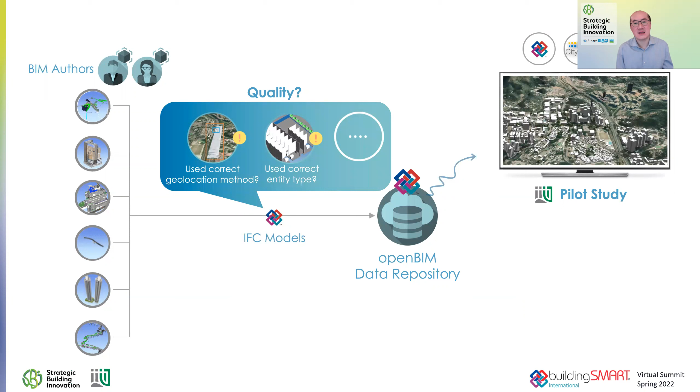As we often see, the geolocation method may not be accurately used or standardized. There may be some IFC entity types that were incorrectly being used, and all these would have adverse impacts, in this particular case, sponsored by the Lands Department of Hong Kong.

And in this case, we are able to work with an emerging standard called the Information Delivery Specification that has been started by the buildingSMART international community about 2 years ago, with the intent of coming up with machine-readable information requirements that can be shared across different implementer software being used by different stakeholders. And the key is to also have an IDS XML that can be interchangeable and interoperable among different authors and software implementation.

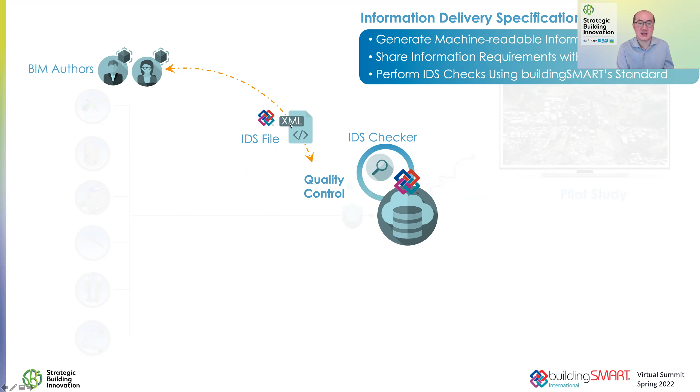And one may wonder, what are the differences between more traditional file-based model checking versus what may be complementary with this IDS approach? Here comes one of my global partners, Mr. Hans Hendriks, joining us from the Netherlands.

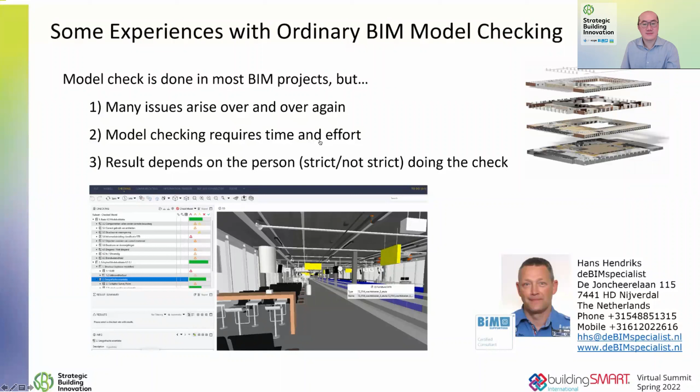My name is Hans Hendriks. I work as an independent BIM consultant in the Netherlands. I also work in the team of SBI, where we gained the first experience with IDS. Some experience that I have with ordinary BIM model checking: there are many issues that arise over and over. The model checking requires time and effort, and the result is depending very much on the person who is doing the model check.

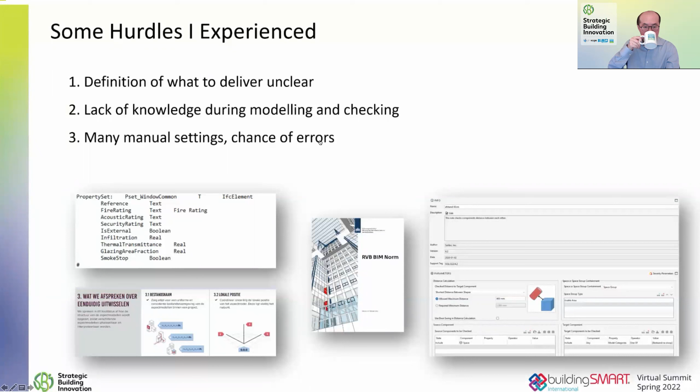Some hurdles that I experienced. In many projects, the definition of what to deliver is unclear. Sometimes there is a lack of knowledge during the modeling, but also during the checking. And there are many manual settings with chance for errors.

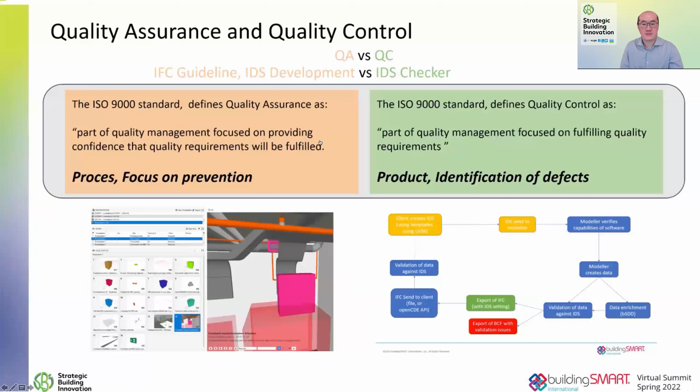I see a lot of potential in using IDS. We are already noticing, using IDS and creating guidelines, that there is more attention to the process and in preventing the errors, as in quality assurance. Of course, the IDS Checker itself remains focusing on identifying issues. I'm happy and proud to be part of this SBI team, where we have the opportunity to develop IDS and this IDS Checker. It's an important step to increase the BIM quality by using buildingSMART IDS.

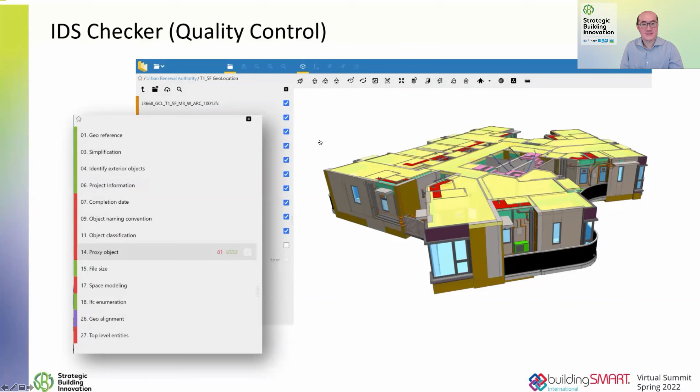Thank you, Hans. Indeed, it's an honor to be with the buildingSMART international community. Even though the IDS is only in its version 0.5, we have been working closely with our global team to identify what may be some opportunities to apply IDS for this agency-wide, territory-wide BIM and GIS data repository. In fact, we are coming up with some criteria that my colleague, Dr. Min Song, will be sharing. Min is joining us from California.

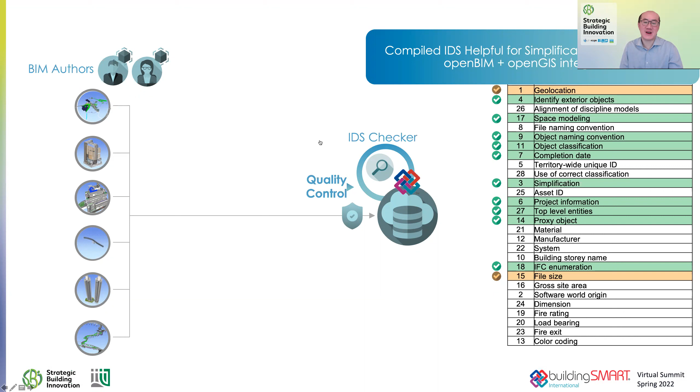This is an example of a specification we selected. And this specification was important to us because one of the things that you have to do in order to create a large urban scale model is to make the models very light. Because in the end, there will be hundreds or thousands of IFC models in the data repository or the 3D map. And if the model size is large, it's not going to perform well.

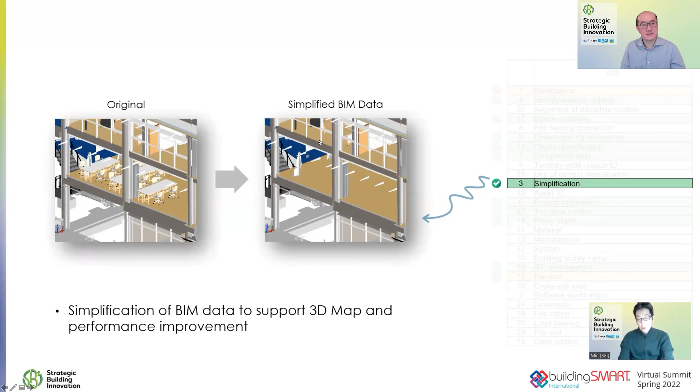So what this specification is doing is checking whether all the IFC furnishing elements have been excluded from the model, so that in the end, it helps make the openBIM and GIS integrated database or platform very light. Another example of a specification here.

So here, this is related to geolocation, and if you see in IFC, we have multiple ways of georeferencing your model. So even within only IFC 2x3, you have multiple ways of georeferencing, and IFC 4 has its own way of georeferencing. But the thing is, not all of those methods are ideal for our purpose. Ideally, when you upload an IFC model to a 3D map, you want it to automatically find its correct position on the 3D map. But some of the methods don't really have all the required information to do that.

So for us, it's important to pick the best method, which in this case was the approach that's being used in IFC 4. So here the specification is checking whether the IFC 4 georeferencing is being used or not.

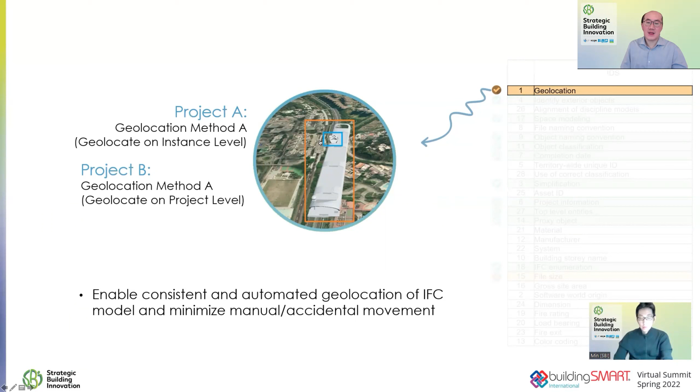Thank you, Min. And be agile. Let's not wait for the IDS to be fully vetted and slow down for maturity. Let's go ahead and implement it. So this is what we have done. We are working closely to implement IDS, in our case using both BIM.works as well as Simple BIM.

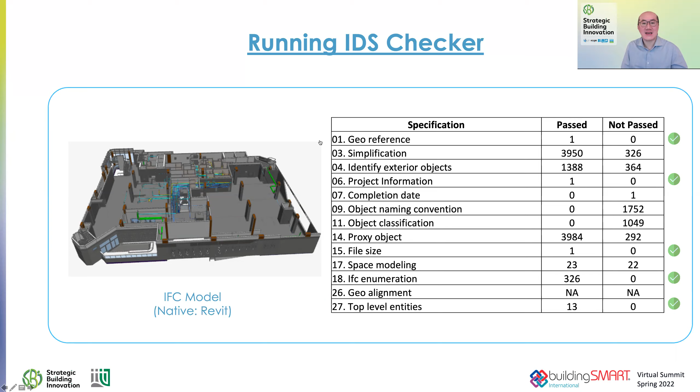And you can see that without IDS implementation, it would be much more difficult to check the thousands of instances where the simplification may not be done appropriately, or that the naming convention or the object classification may not be following the standard. So how does IDS work? Let's hear from Ruben with BIM.works, joining us from the Netherlands.

I will be running the model checks for IDS Hong Kong. And what you will see here is all the different checks with the numbering that we've used in the Excel sheets that have been communicated and the work report. And each number corresponds with one of the checks. So these are 13 or 12 checks. Green means that it is a success. Red means that it is an error. And you can drill down for each check to see more details.

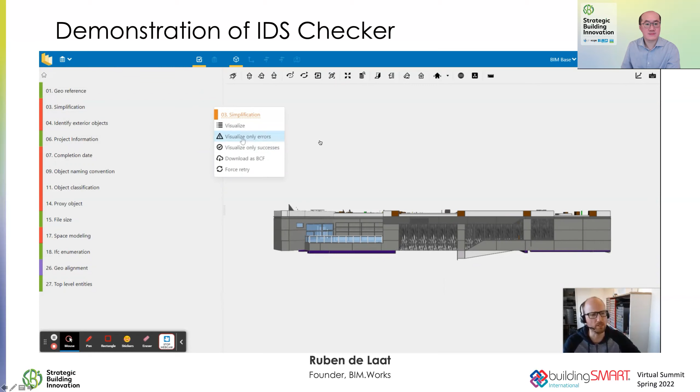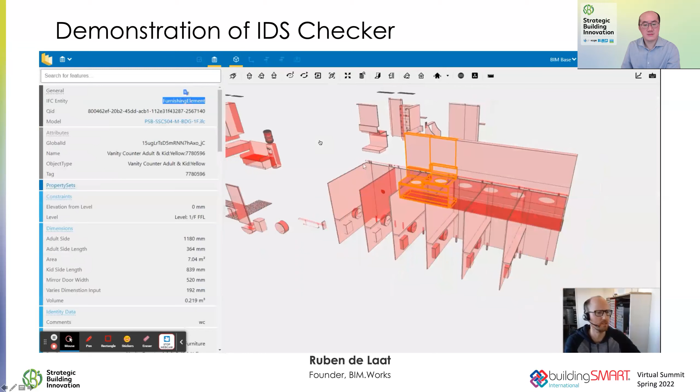So what you can do is you can click this button and, for example, say I only want to see the errors. So you are filtering the 3D view by showing only the objects that are identified as being errors. And you can see that these are indeed the IFC furnishing element objects in this model. So if you click on an object, you can see the type here, IFC furnishing element. So these are all errors in this model, according to this IDS check.

And on top of the IDS, as agreed upon by the bSI community, we understand that our client may also want further custom checking that may go beyond what IDS currently allows in version 0.5. So let's not stop. Let's also go work with commercial off-the-shelf technology to customize for them. Min will explain that a little bit further.

In the end, we had around 28 specifications we wanted to check. But one challenge was that not all of them could be checked with buildingSMART's IDS standard, because it is somewhat limited to non-geometry checks, and also if you have multiple attributes and properties that need to be cross-evaluated at the same time, it's not easy to do so with buildingSMART's IDS standard. So for those more difficult ones, we decided to use other commercial tools like Simple BIM for checking.

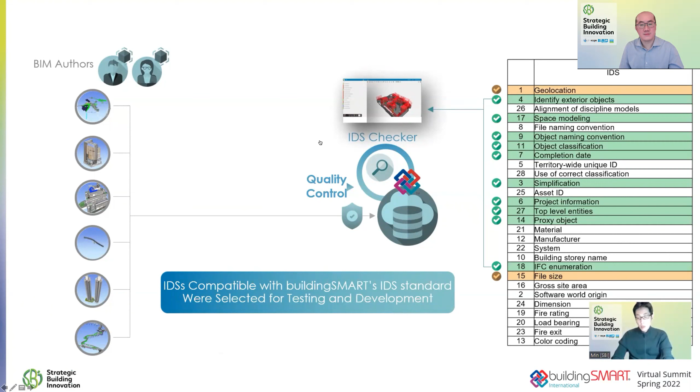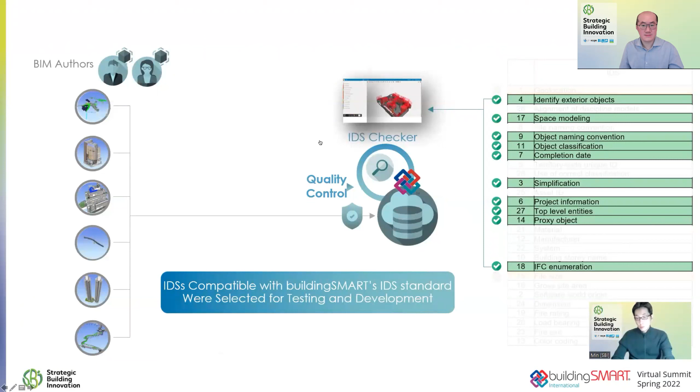And for the IDS check following the buildingSMART IDS standard, we focused on the ones that you see here, and those were programmed into the IDS XML. So in a nutshell, we want to focus on quality assurance and quality control. It's a matter of empowering both the repository gatekeepers to be able to run IDS checks and also supporting the BIM authors, empowering them as well with good IFC guidelines that have the schema and the IDS in mind.

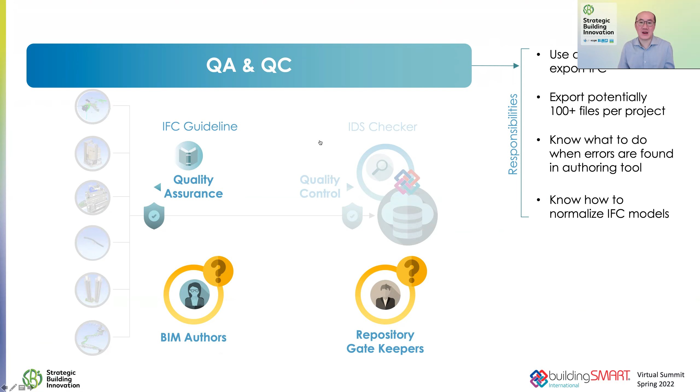Sure, there's still a lot of responsibilities that we need to work with, and this is an active project that is work in progress. We look forward to sharing back with the buildingSMART community as the project unfolds and look forward to teaming up together.

And indeed, the value of the IDS work is that it can empower the clients, the professionals, and the operators. And in fact, that reminded me of what took place 20 years ago. For the past 2 decades, I have been a researcher at Stanford University CIFE, where we were invited to work for the Finland government Senate Properties in one of the first ever IFC applications in the world on the

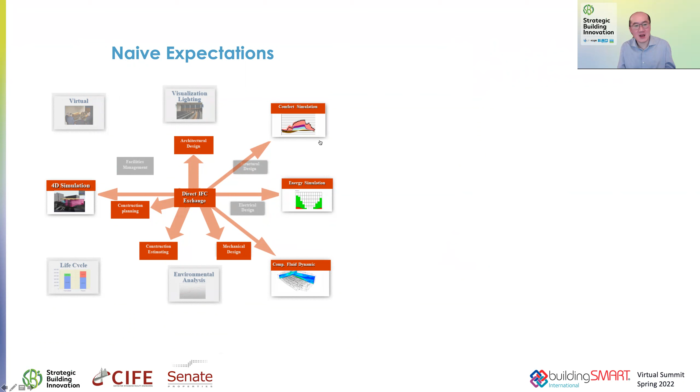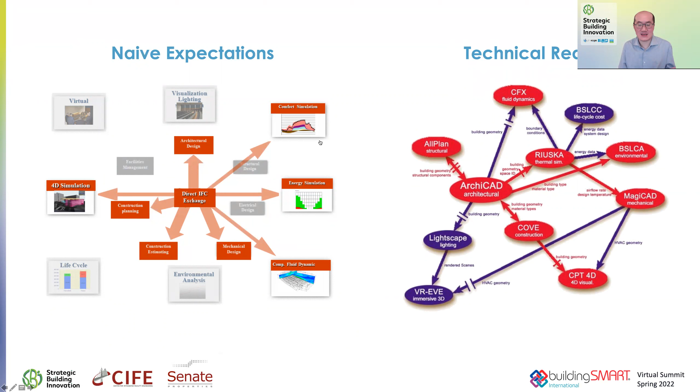Aalto University renovation projects. At that time, we were drawing what we may call today a BIM diagram to identify: would IFC be in the center of this exchange? Can we have reliable bidirectional exchanges? And before long, we noticed that the technical reality would be different, that depending on the software implementation, some of the geometry, some of the information may not be dependable for a bidirectional and full fidelity exchange.

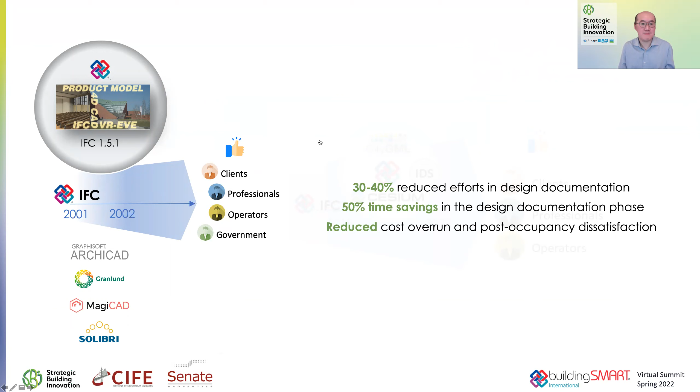Even though those were the challenges, it did not slow our team down from redeeming the promises of openBIM, such as 30 to 40% reduction of design documentation efforts, 50% time savings, and also much better lifecycle value that we could present for the facility management phase. But it's also because of those specific framework and client-driven requirements that has also helped another implementation of openBIM to be more specific and to have the end in mind.

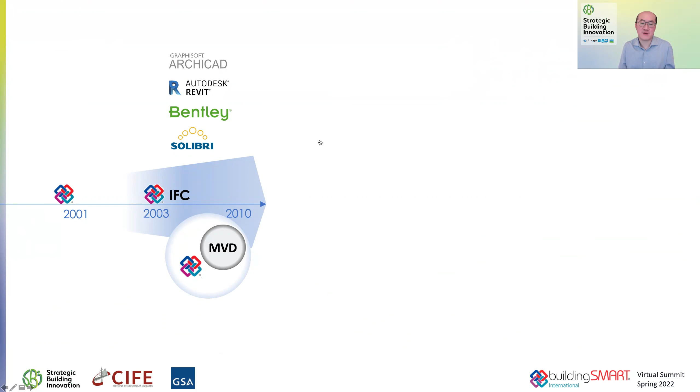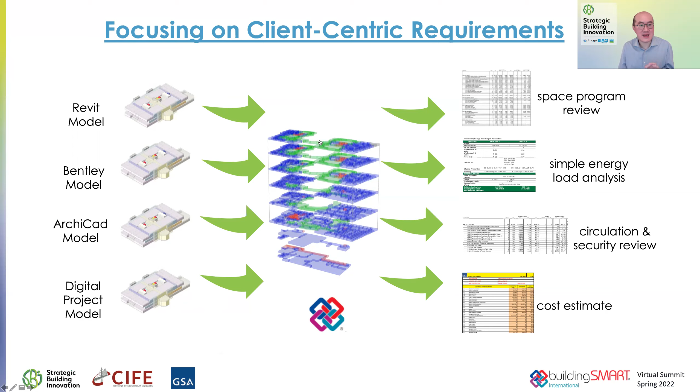That was the third public agency that we want to feature in this presentation, which is the US General Services Administration. In between 2003 and for the next decade or so, we have been focusing on what are the client-centric requirements, such as space, such as energy, such as circulation security, or quantity, that were needing us to really come up with an understanding of what are the specifications. That led to one of the first model view definitions that were generated in the bSI community.

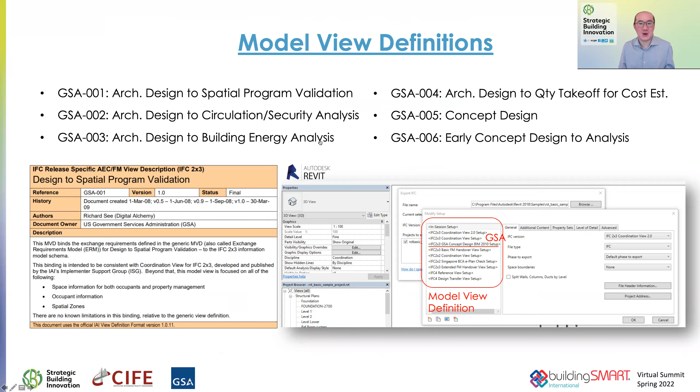And at that time, we contributed to some 6 of them, working closely with the vendor partners, working closely with the MVD experts. 2 of them were Richard See and Jiri, who will be sharing his perspective of how we have also learned from such MVD approach to what we see as the IDS approach that we just talked about.

Jiri. Hello, my name is Jiri Hietanen, and I am the co-founder and CEO of Datacubist. I have a long history with model view definitions, or MVDs, dating back to the Concept Design BIM 2010 project with the General Services Administration in the US, Statsbygg in Norway, and Senate Properties in Finland. I was also the first MVD coordinator of buildingSMART International. Our current solution, SimpleBIM, is a further evolution of the MVD idea. Like MVD, it allows you to define what data is needed and to validate that the data is reliable and stored in the appropriate IFC data structures.

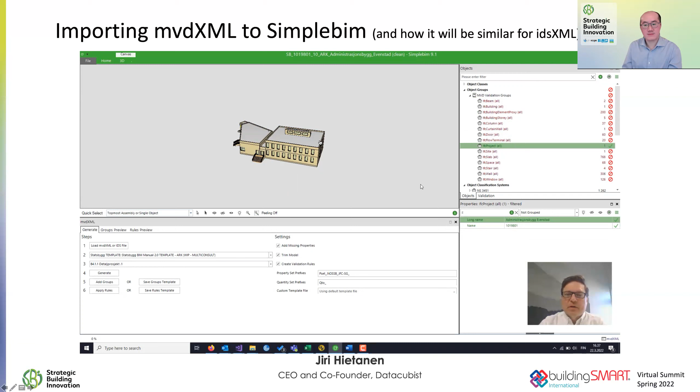We plan to support IDS in the same way that we support mvdXML. We don't have that support yet, but this is how it will look like. So here we have a very simple IDS requirement. It's basically saying that the model should not have any furnishing elements in it. And when we generate the corresponding SimpleBIM template, it will look like this.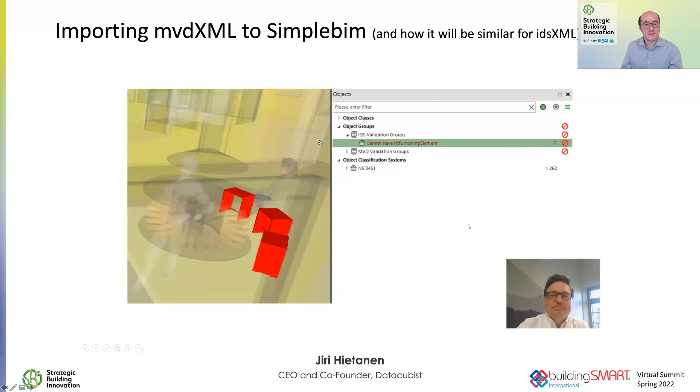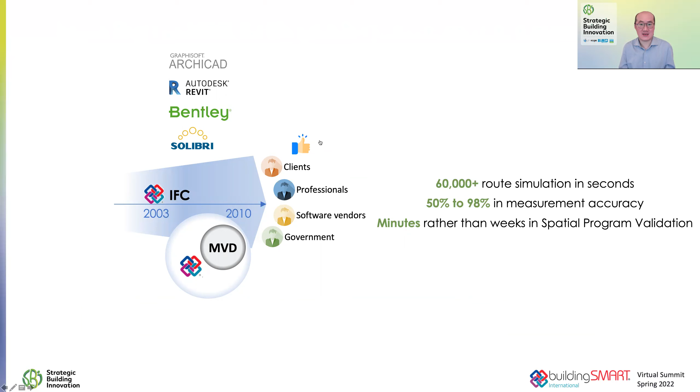Beyond public agencies in 3 different continents, my SBI team has also been working with private real estate developers to leverage openBIM solutions such as IFC, BCF to bring value to make more informed design, construction, and property management decisions. Working with SHKP, we have applied openBIM approach and workflows to a number of commercial and residential as well as mixed-use projects. In one such project, we may be dealing with over 1,000 BIM files by a number of different design consulting teams using a number of different versions of the same application or different software applications at large.

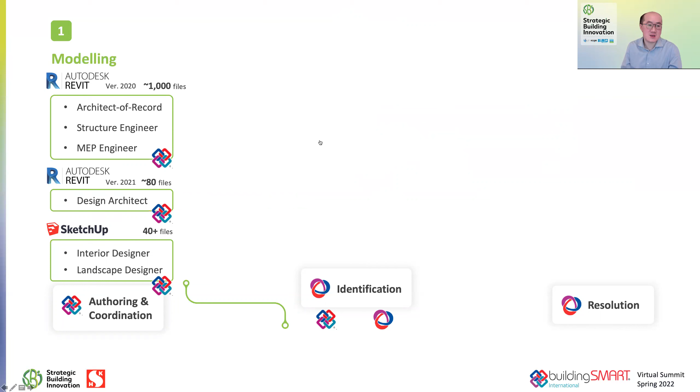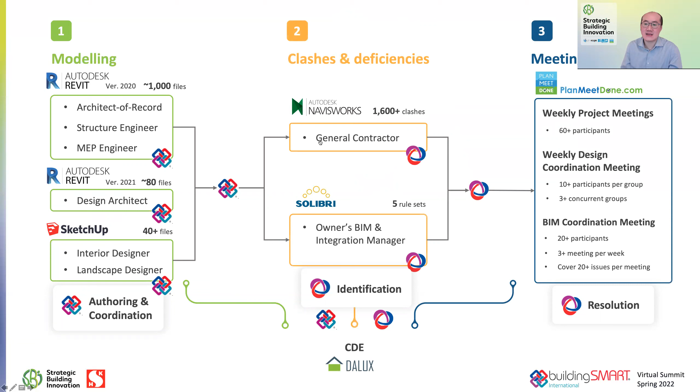And we are able to bring them in through IFC to do model checking, to do model automation, and be able to then bring that into meetings, such that during meetings when we have tens and tens of professionals spending valuable time, we can zoom in to where we need to make the most informed attention and decision. And so how to leverage BCF, it's also an emerging trend and workflow that we are standardizing through the use of our own developed PlanMeetDone solution to try to bring all the design, construction, rule set, and results into management attention.

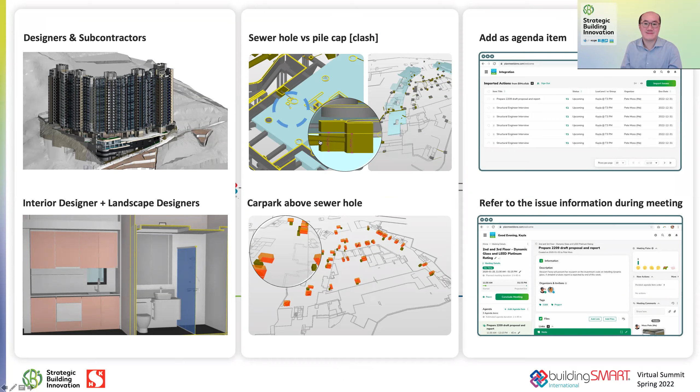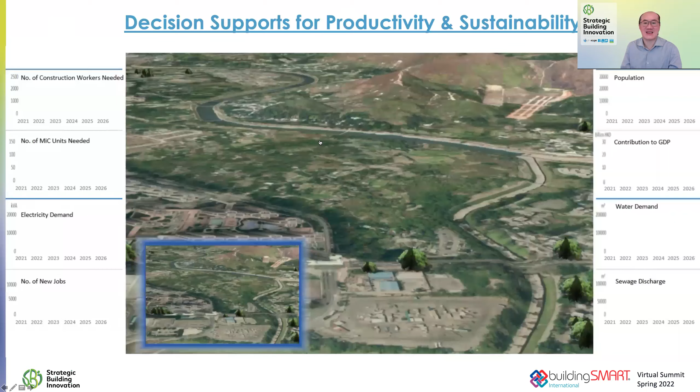Reflecting back on the journey, it's also important to look forward to the future with all these open standard solutions under the belt. Digital twin is certainly one of the more exciting futures that is ahead of us. In fact, can we rely on the openBIM, openGIS repository that we just talked about to inform us with productivity and sustainability information? So let's hear from the Lands Department of Hong Kong, Nelson, about the vision of where we want to go beyond the IDS.

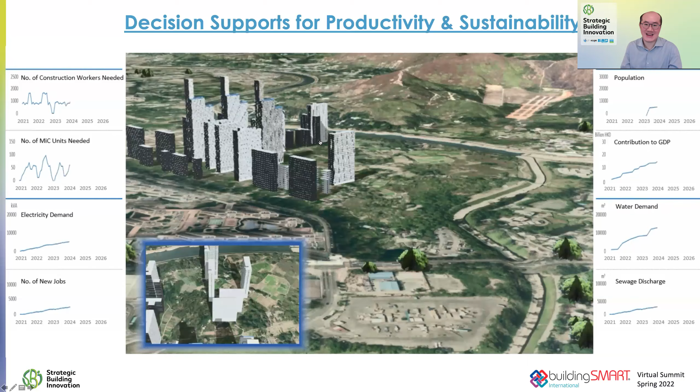Now we are talking about the importance of IDS in planning and development of 3 phases of the BIM Data Repository. In phase 1, we harmonize the BIM standard provided by different contracts under government departments. Phase 2, we use the harmonized BIM data to update the 3D maps. In phase 3, we adopt the open standard in the BIM Data Repository to develop a BIM API in order to support other use cases such as valuations and territory-wide 3D simulations.

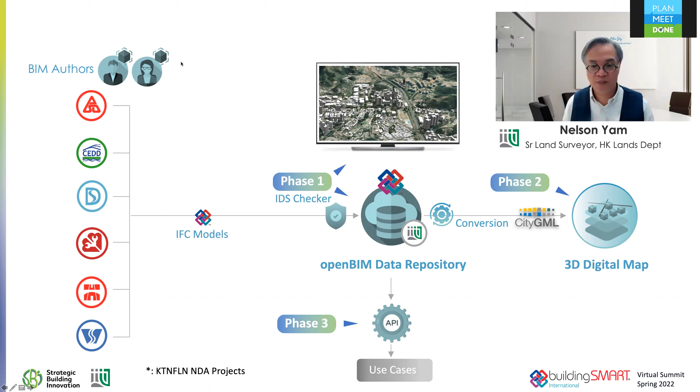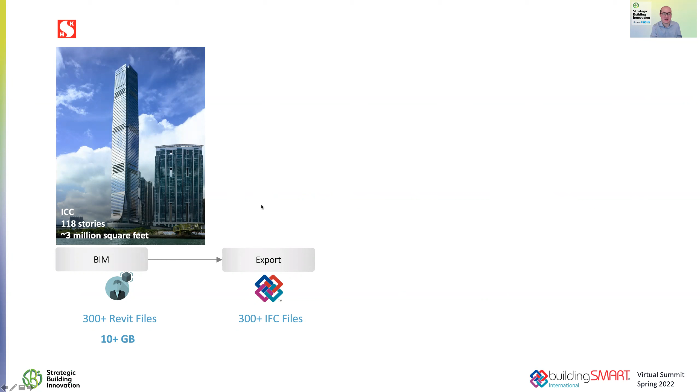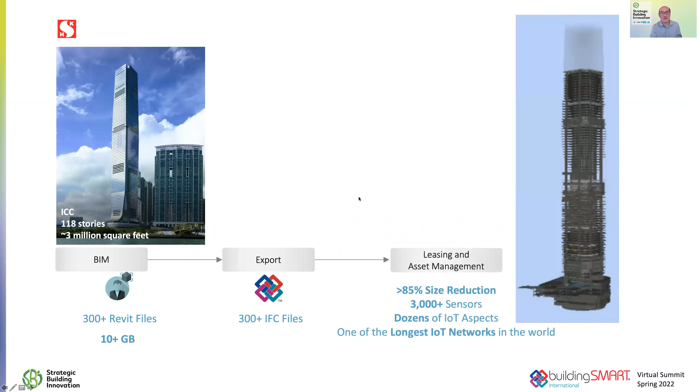Thank you, Nelson. And indeed, with such API, with such connectivity, we can do more than the static BIM, than the static asset representation. Such as back with SHKP, we're able to turn one of the tallest buildings in the world to leverage IFC reliably and powerfully to allow us to not only benefit from BIM for facility management, asset management, but also connect that with different forms of Internet of Things sensors and data that we can build upon. So in this project so far, we are starting to look into a portfolio of dozens and dozens of IoT aspects, adding up to 3,000 and counting individual sensors.

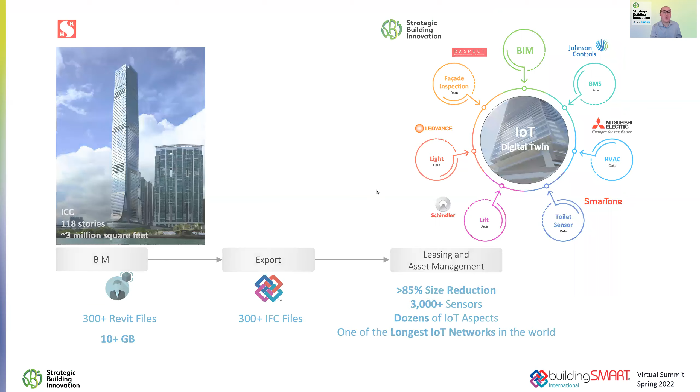Exactly where we can go with openBIM-based solutions and workflow, it still has a huge opportunity for all of us to team up together. But the key we want to highlight today is that technologies and standards may never be perfect, but rather than staying back as a passive consumer and waiting for complaints and for developments to fully take place, we should stay at the forefront to work with clients, to work with the openBIM workflow, and try to bring values to the forefront.

So once again, we're privileged to be here today at this international keynote and looking forward to teaming up with the buildingSMART international community for more workflows, for more client-centric value.